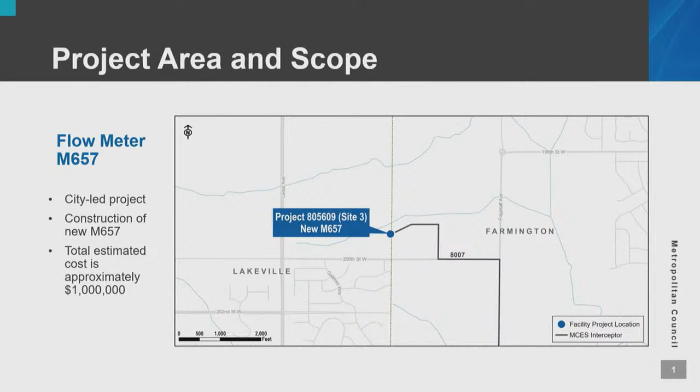So our proposed action is that the Metropolitan Council authorize its regional administrator to execute a cooperative construction agreement with the city of Lakeville for the construction of a new flow meter, meter M657, MCES project 805609, for an amount not to exceed $1 million.

Questions for Mr. Wadeen? I actually was on the city council when that pipe was put in, and the city paid extra back then to extend it to the city border in preparation for this development going on. So it's part of that long-term thinking and long-term partnership with the Met Council.

So I would move approval for this. Is there a second? Second. Motion's been made and seconded. All in favor, say aye. Aye. Nay. Carries.

Thank you, and on to our next item, which is a rehab for an interceptor in Coon Rapids, authorization to hold a public hearing. There you go.

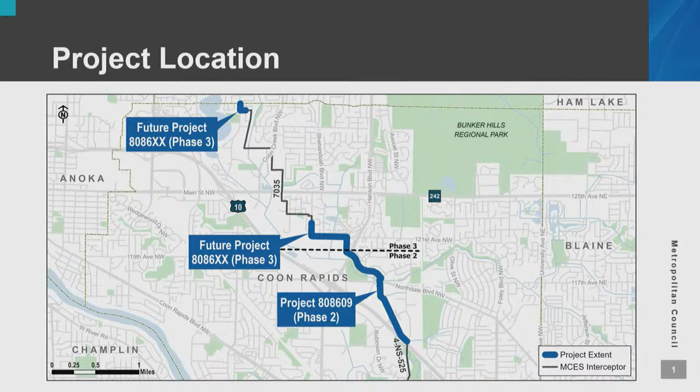Thank you, Mr. Chair. Business item 2024-227 is, as you stated, authorization to hold a public hearing on the draft facility plan for the Coon Rapids Interceptor Rehabilitation Project. This project is actually phase 2 of a project we already completed, or were wrapping up final completion on for phase 1. It starts north of Highway 10 in Coon Rapids and winds up through a residential area.

The pipe in this location, Interceptor 4NS 525, as well as Interceptor 7035 and meter 218, we've performed a condition assessment of these assets and determined that they're in poor condition, in need of rehabilitation. They include a 36-inch and a 48-inch reinforced concrete pipe, as well as a 6-inch Parshall flume meter, that's meter 218 up on the north end of the project.

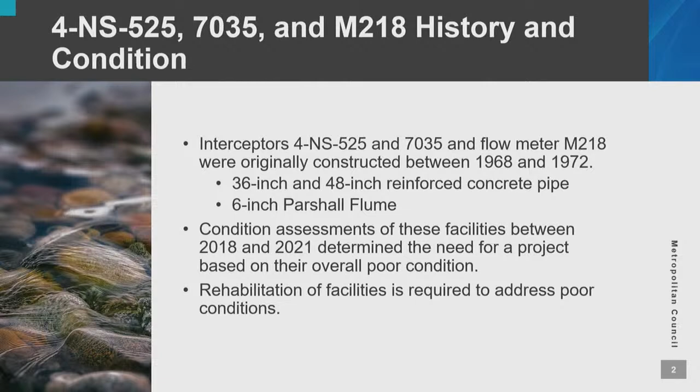Rehabilitation of the facilities is required to address the poor conditions, and as part of that, we have prepared a draft facility plan. Part of that facility plan process includes a public hearing to inform the public what the work will involve, that we've gone through and performed a good evaluation of the alternatives for the area, and that we're making good use of taxpayer dollars as we advance the project.

So the proposal right now is that September 25th, which would be the next Metropolitan Council meeting, this would be available for approval, pending Environment Committee's approval of the action. Following that, we would hold an open house with the City of Coon Rapids around September 30th.

Our public hearing is preliminarily scheduled for November 19th. We would be able to come back to council for adoption of the final facility plan, which would incorporate a lot of the comments, questions, and additional information we receive as part of the public hearing and open house. That would come back to council in January of 2025.

We're targeting submittal of the facility plan to the Pollution Control Agency for Public Facility Authority funding in March of 2025. This is a long process to make sure we get this done correctly. Our proposed action is that the Metropolitan Council authorize a public hearing in November 2024 to gather input on the draft facility plan for the Coon Rapids Interceptor Rehabilitation Project, MCES project number 808609. With that, I'm available for questions.

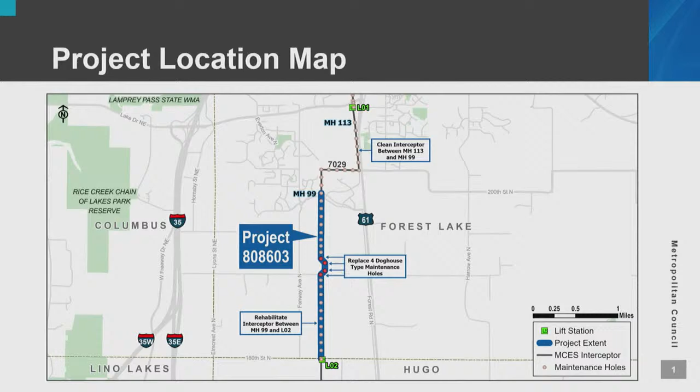So, improvements required: this is a 36-inch reinforced concrete pipe installed in 1971, and based on recent inspections from 2018, this pipe was found to be in poor condition. As previously noted, we're looking at three different scopes of work within this project: to clean it, rehab it, and replace some portions of the existing manhole structures to provide better access and longer-term maintenance and inspection.

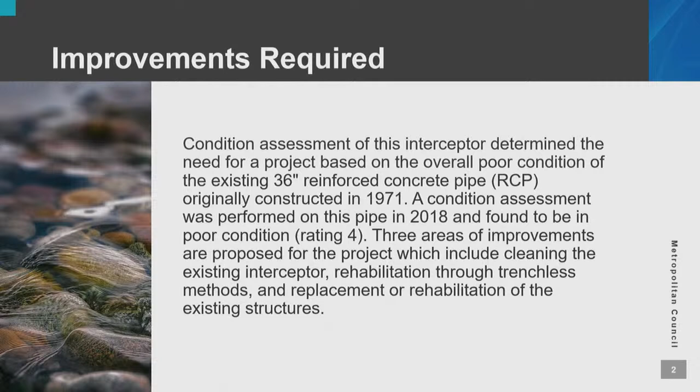So the next steps, listing the dates as noted previously: this is a longer process to go through the facility plan process. Pending approval tonight of the Environment Committee, the council would take action on the 25th. We are looking at a November 10th public hearing date, subject to change. In January 25, we would look for the full council to consider comments and adopt the final facility plan. And in February 2025, submittal to the Public Facilities Authority and MPCA for inclusion into the intended use plan.

So with that, Mr. Chair, the proposed action is that the Metropolitan Council authorize a public hearing to gather input on the draft facility plan for the Forest Lake Interceptor 7029 Rehabilitation Project, Number 808603.

And I can take any questions. Councilmember Wolf?

What is a doghouse type maintenance hole? The base of the manhole is larger, with larger pipe down there, so they have a 6-foot round structure to create bigger dog houses for the pipe to fit through. Then they have a top slab on that, but a smaller diameter riser, a 48-inch structure riser. So they call it a dog house, but it's bigger, has a flat top on it, and then a smaller diameter riser on it.

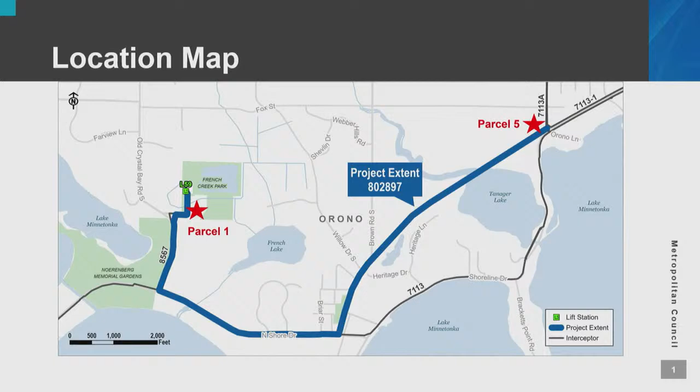So some of the project background, I'll just kind of summarize. Again, this Force Main was built in 1979, so we're about 45 years into the service life of this pipe.

The flows are such that some of the peak flows are 1,000 gallons per minute or higher, so that with a single pipe that exceeds our ability to, if there were a break or other event, use a tanker truck or other ways to haul flow around. So we lose that ability to maintain service reliability without a redundant pipe.

And temporary conveyance to restore service would take some time, and in that unfortunate event, that would mean a spill for the council. But it also gives, on the flip side, better maintenance opportunities to inspect one pipe while having another one out of service, going forward with this pipe in the ground.

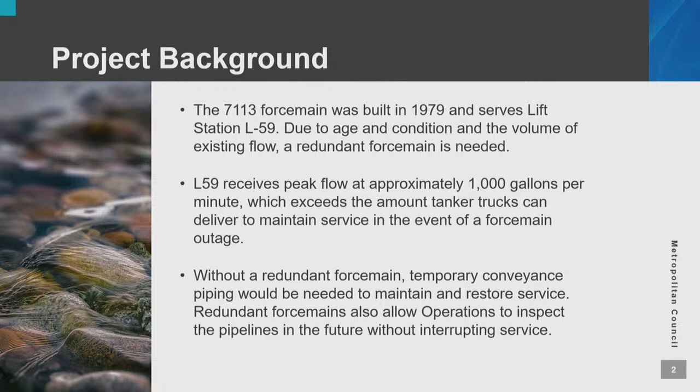So project background: most of the work is within county right-of-way, whether that's Old Crystal Bay Road, North Shore Drive, and a lot of it, over 7,000 feet, is on or adjacent to the Dakota Rail Trail. However, the 2 properties noted are private properties. On parcel 1, the westerly one, we'd just be looking for a temporary easement for additional space to do the work on the project. Then on parcel 5, we'd be looking for a little bit of permanent and temporary easement from that property owner.

So the proposed action, Mr. Chair, is that the Metropolitan Council adopt Resolution 2024-17, authorizing the acquisition and condemnation of real estate property for the Orono Interceptor 7113 Improvement Project, MCES project number 802897. Very good. Any questions, or yeah, please.

Yeah, I just had a question. So this was built in 1979. It wasn't a policy to have a redundant setup during that time, or is this just because you're replacing it now and putting it in using a redundant setup? What was the standard in 1979?

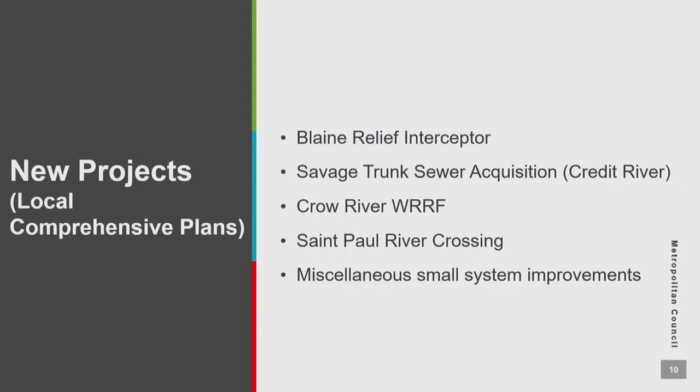And with that, I'll turn it over to Renee to review the plant projects. Thank you, Kyle. Good afternoon, Mr. Chair, and good afternoon members of the Environment Committee. For the record, my name's Renee Heflin. I'm manager of plant engineering.

I'm here to cover the proposed changes included in our request for the 2025 capital program, specifically for the water resource recovery facilities. Adam Gordon, manager of Interceptor Engineering, will make a similar presentation for the Interceptor system. Our intent here is not to review all of the current projects in the capital program, but rather to highlight the major changes we're requesting to carry forward from the 2024 program into 2025.

There are 13 programs or collections of projects for the water resources recovery facilities. The two programs shown in red, items number 1 and 3, are near completion and will soon be closed. Program 8059, Metro Rehabilitation and Facilities Improvements, which began with a 2009 facility plan, will be closed in 2027 upon completion of the services building at the Metro. Program 8074, Empire Solids Improvements, will be closed in 2026 upon completion of construction of Phase 2 improvements, that includes a combined heat and power generator and related improvements.

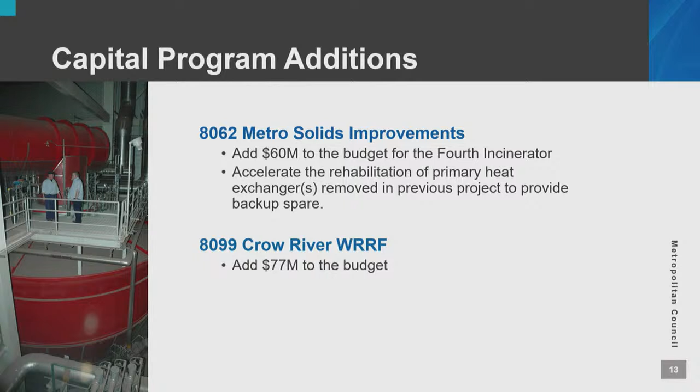Program 8078, Regional Plant Improvements, is a program that addresses more near-term needs of the regional facilities. There are 2 major changes being requested for this program.

The first is the addition of $13 million for rehabilitation work at St. Croix Valley Water Resource Recovery Facility. This project started out as a $5 million bar screen replacement, and it has since grown, and we need to address additional rehabilitation needs.

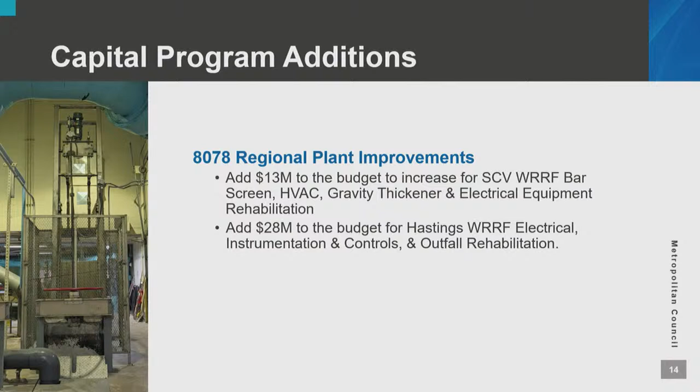The second major change is the addition of $28 million for renewal work at the existing Hastings facility. This will allow us time to reevaluate the long-term service plan for the city of Hastings. And those are the highlights of the changes to the plant program.

Next, I will turn it over to Adam Gordon for the interceptor system. Thank you, Renee. Mr. Chair and committee members, my name's Adam Gordon. I'm the manager of the Interceptor Engineering Department.

The projects, just to highlight 4 of them: on the very north end, we have a lift station electrical rehabilitation in Forest Lake and Hugo. We have lift station odor control improvements in Woodbury. We have a force main replacement project that's ongoing right now in Spring Park and Mound.

And we just initiated a siphon outlet structure replacement in Eagan that handles all the flow from Burnsville and from Bloomington. So some large, important projects.

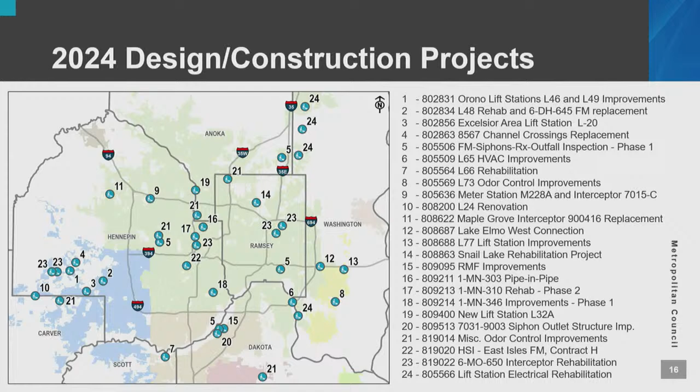I wanted to briefly go over how we prioritize projects. I think this relates a little bit back to Chair Lindstrom, your comments about how we identify things and how do we prioritize things going forward in the program. I wanted to just cover quickly the process that we go through when we identify deficiencies and how we identify them as new projects.

The prioritization is a risk-based assessment, which is a product of the consequence of failure rating and a likelihood of failure rating. Our consequence of failure ratings, or severity, follow our organization's level of service that Kyle is covering. Examples of reducing spills, increasing safety, or reducing operational cost are some of those types of examples. The range can be thought of as going from manageable to unmanageable, on a scale of 1 to 5, with major or severe having significant impacts to our environment, our residents, workers, or even the council.

The likelihood of failure is more of a determination that comes out of our condition assessments. So you hear Tim Woodine and Chris Remus talk about how that pipe is in poor condition. They use ratings, and we've been using those ratings of pipe conditions in our interceptor system for a couple decades now, following industry standards. Likely, which sort of corresponds with a pipe assessment as a poor condition pipe.

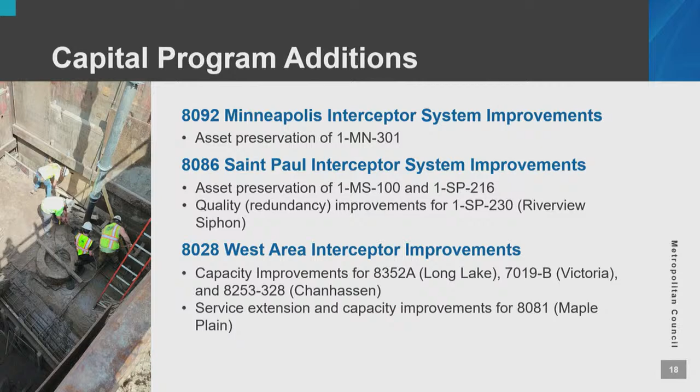In the west area, we have several capacity needs. We have both the Long Lake Interceptor 8352A, Victoria 7019-B, and Chanhassen 8253-328, which recent modeling has shown will have capacity issues coming up.

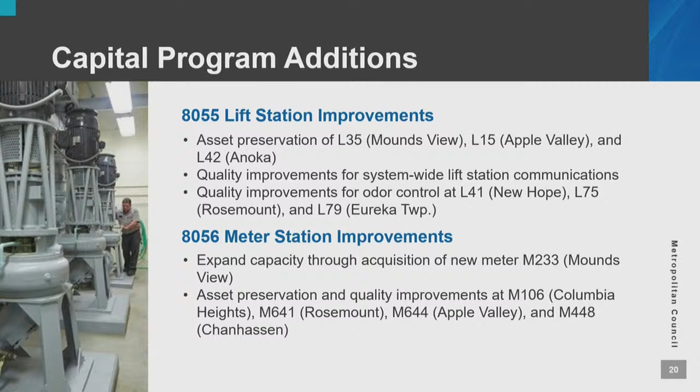And with that, I'm going to turn it back over to Kyle to talk about schedule.

To wrap up here, today you can see on the schedule September 10th is the informational meeting we're presenting to you today. Then next month in October, there will be a presentation to the council reflecting the unified capital program that includes all the division capital programs.

Matt Selmeyer, I believe, will be presenting that on behalf of the ES part of the unified program. Then typically at the last meeting of the year, the council will adopt all the final capital projects and levies. With that, we can entertain any questions, Mr. Chair.

Any questions? Councilmember Wolf? Thank you, Mr. Chair. I still kind of shudder when I see how big the lines on the graph get for the capital program going forward. What's that going to do to rates?

Mr. Chair and Councilmember Wolf, that's a good question. At the end of the process of identifying projects and prioritizing them within the time schedule, we do submit the cash flow to Matt's group in finance. We assume a 70% spend rate, and we do a rate analysis.